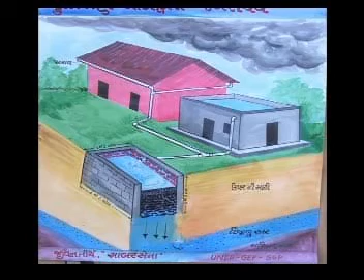Water harvesting through recharging pits. The model shows how to harvest water through a recharging pit. If an area of 100 to 200 square meters is available, this system works best. Make a pit 2 meters long, 1 meter broad and 1 meter deep. Fill it with brickbats, stones, pebbles and sand.

All the water around it is directed to the pit. The accumulated water percolates slowly to the earth. The cost of this system is less than 2,000 rupees. All the water that falls into an area of 100 to 200 square meters can be sent down. The percolated water provides moisture for small plants or kitchen gardens, reducing the need for frequent irrigation.

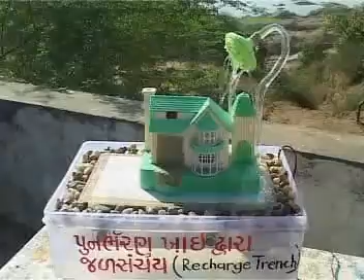Water harvesting through rechargeable trenches. The system is most effective when you want to harvest the rainwater in a plot of 500 to 800 square meters. Dig a trench 1 meter broad and 1 meter deep around the plot of land, either outside the garden or inside the walls. Fill the trench with brickbats, stones, grit and pebbles so that water seeps down easily.

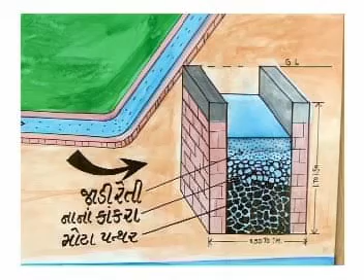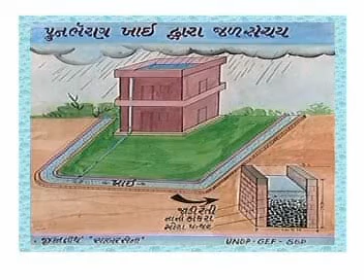Normally, the top layer of earth prevents the rainwater from seeping into the earth fast enough, and it flows away. The trench with stones, grit, pebbles, etc., allows the water to go down fast, and then it seeps into the lower layers of the earth. The water, thus harvested, provides a lot of moisture to the plants in the land, and the need for frequent irrigation is considerably reduced. This system saves a lot of water. It is most suitable for plots of 500 to 800 square meters.

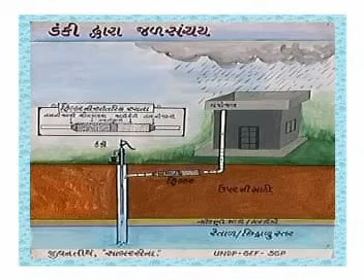As you can see, the water is filtered through a pipe filter before storing it. Any dirt or impurity is filtered out before the water enters the tank or the well. This is a highly effective way of harvesting and storing rainwater for daily use.

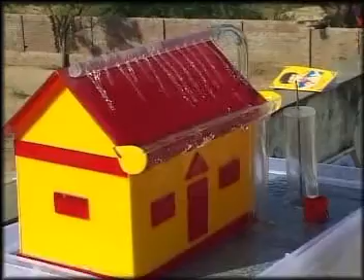Recharging through the Khambat well system.

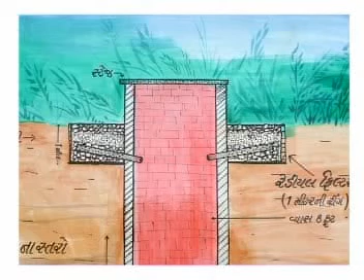The Khambat well system. This shallow aquifer recharge system allows large amounts of water to percolate into the earth. When there is a sandy stratum at 20 to 30 feet, this system allows much of the water to seep through. First, dig a well 30 feet deep and 8 to 10 feet in diameter, its walls built with bricks with gaps in between. Soak pits used to be constructed this way earlier.

Around the well, build a ring 1 meter in diameter. This is called a radial filter. It is filled with brickbats, grit and pebbles. The water in the whole area around gets cleaned at the radial filter and goes into the well through the pipe. When there are heavy and prolonged showers, we have a 30 feet deep well to store the large quantity of water. It can store almost 40,000 liters of water that can be used as a buffer.

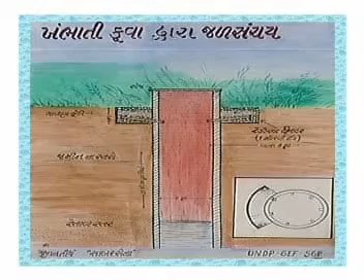The water in the well keeps on seeping into the earth, while new water gets added to the well with more rains. This system is a boon in places where there is water logging. This stored water could be used from the well or directed to the bore well. This is the Khambhati well system, most effective when you have a sandy stratum at 20 to 30 feet below the earth.

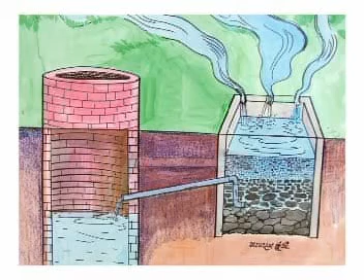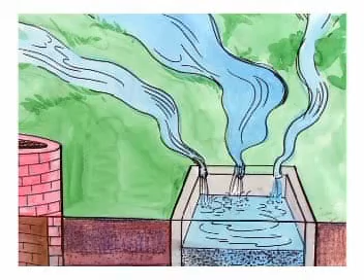Dig a pit 2 meters broad, 2 meters long and 2 meters deep. Fill it with grit, stones, pebbles and sand. If there are any small channels around that carry rainwater, they are directed to the pit. The water gets filtered in the pit and goes to the well through a pipe from the bottom of the pit. Such filtration is important to avoid mud filling up the well.

This system can be set up at the cost of 4 to 5,000 rupees and it stores a lot of rainwater. The water can be very useful for irrigation.

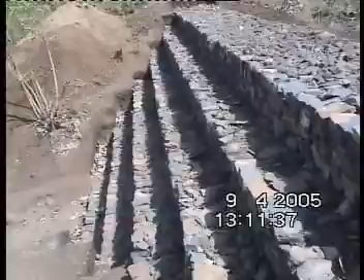If bamboos and wood are not available, check dams can also be built with stones. Stone-made check dams have to be well compressed, compacted and pitched to make them strong, able to stop the rushing waters. Check dams are often constructed to get water for home use and for cattle. Different designs of check dams have different advantages and disadvantages.

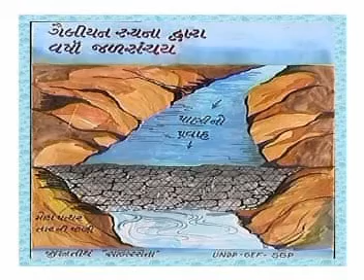A third kind of check dam is called a gabion structure. Check dams made of stone can break up when water gushes down with great force. If the stone structure is held together with a strong metal net, the whole structure stands as one unit and resists the force of the water. The water then percolates down to the earth and goes slowly downstream.

If the slope of the stream is not big, a check dam made of filled sacks can stop the water. Cement or fertilizer sacks are filled with sand or mud and stitched up. They are so arranged as to reduce the flow of water. It is a quick and cheap check dam to allow the water to collect, percolate and flow down slowly.

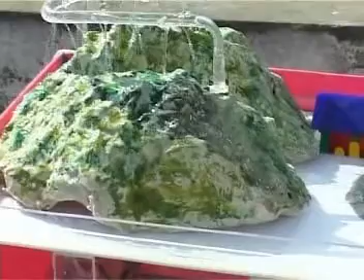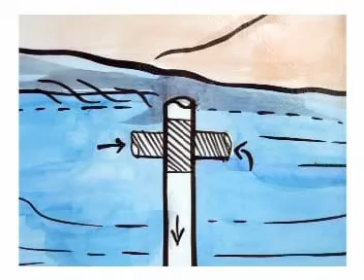In hilly regions, the rainwater comes to ponds through small streams. When the pond is full, the overflow goes out. In order to save the overflow water, a bore well 150 to 200 feet deep is dug in the middle of the pond. On top of it, a T-shaped pipe is so fitted that the overflow of the pond goes into the bore well and gets absorbed into the earth.

The water in the bore well can be used. The water that seeps into the deeper levels recharges the wells around the pond. A lot of water can be sent down to the earth this way. This system has been very effectively used in the Kutch, Saurashtra and North Gujarat regions. It can also be seen in a village between Ahmedabad and Gandhinagar.

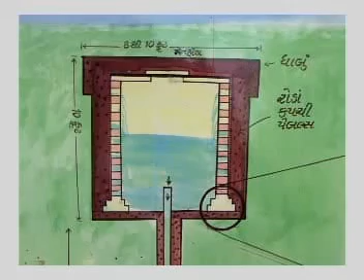A well 8 to 10 feet in diameter and 10 feet deep is dug. A tube well 200 to 300 feet deep is dug in the middle of the well. A radial filter is built around the well. The water in a large area around gets filtered in the radial filter and goes to the well. From the well, it goes down to the earth through the tube well.

In areas where there is a sandy layer of earth or a sweet water stream, water can be sent below through a strainer pipe. If the topsoil does not let water seep down, an ordinary pipe is put to let the water go down. To send the water down to lower strata, a strainer pipe is put with perforations that allow a lot of water to seep in. This artificial system of recharging the deeper layers through a tube well could raise the water table in the whole area and benefit tube wells in a 5-kilometer radius.

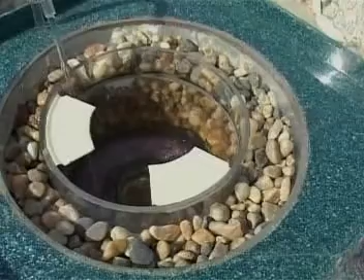Water distribution in cities. Normally in high-rise buildings, the flats at the lower levels get water with high pressure and the flats higher up do not get sufficient water. The pressure of the water column in the pipe ensures fast discharge of water in lower level flats. A differential pipeline system can remedy this problem.

Bigger pipes supply water to the topmost flats, somewhat smaller pipes provide water to middle level flats, and even smaller pipes carry water to the bottom flats. All flats get water with equal pressure because of the differential pipe system.

In a variation of the above system, separate pipes carry water to each flat so that the consumption of water by each flat can be metered and charged accordingly. It would avoid complaints of overuse of water by some families. Many cities would soon start metering the water supplied to control the use of scarce water and recover the costs of water supply.

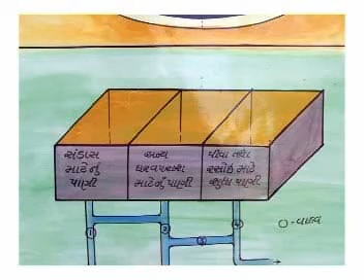It is also possible to have 2 or 3 compartments in the overhead water tank. One of them could supply pure water only for a limited time for drinking and cooking. The other compartment could supply water 24 hours for washing, toilets, etc. But this water could be recycled water. This can ensure limited but pure water for drinking and cooking and recycled water in greater abundance.

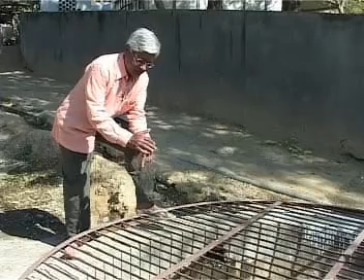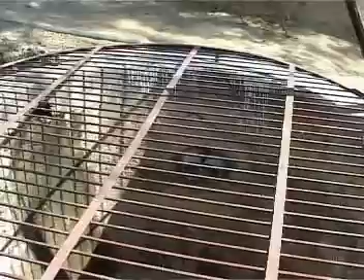This well is at Old Koba village between Ahmedabad and Gandhinagar. It was abandoned years ago because the village gets water from a bore well. Sabar Sena decided to recharge the well for use in the village. All the water falling on the campus of the primary school next to the well is cleaned in a filter tank and sent to the well through two pipes.

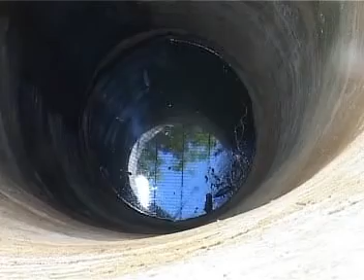You can see the filter tank in the school campus and the pipes carrying the filtered water to the adjoining well. The filter tank is filled with grit, pebble and sand. All the water that falls in the school campus gets filtered and stored in the old abandoned well.

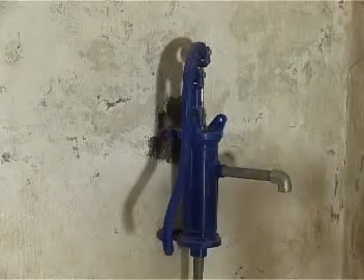We have also set up a system to harvest rainwater for drinking in the pre-primary school of our village. We want to show the children water harvesting techniques in real life. All the water that falls on the roof of the school is directed to the 7,000 litre tank through pipes. In the classroom itself, a hand pump has been installed so that the students could draw filtered rainwater for drinking as and when they need.

All the drinking water used throughout the year at our NGO next door, Jeevantirth, is from rainwater harvested through an underground tank. After the tank gets filled, the surplus water is directed to an abandoned hand pump to recharge the well and let the water seep into the earth. The water falling on the terrace is directed through pipes in the wall to the underground tank.

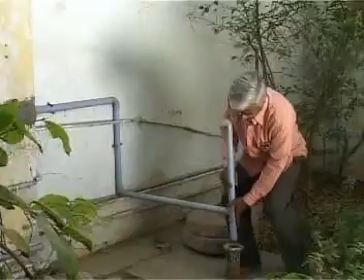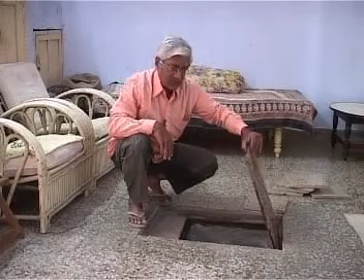Our 14,000 litre capacity tank is built in the Deenbandhu Gobar gas plant design. It is in the shape of a circular jar, broad at the bottom, narrowing down towards the top. This design makes the tank very strong and does not use any iron rods for construction. The tank is in our living room. With water below, it is the coolest room in the house. The tank is closed with a lid, sand spread over it and tiles laid on it to hide the lid.